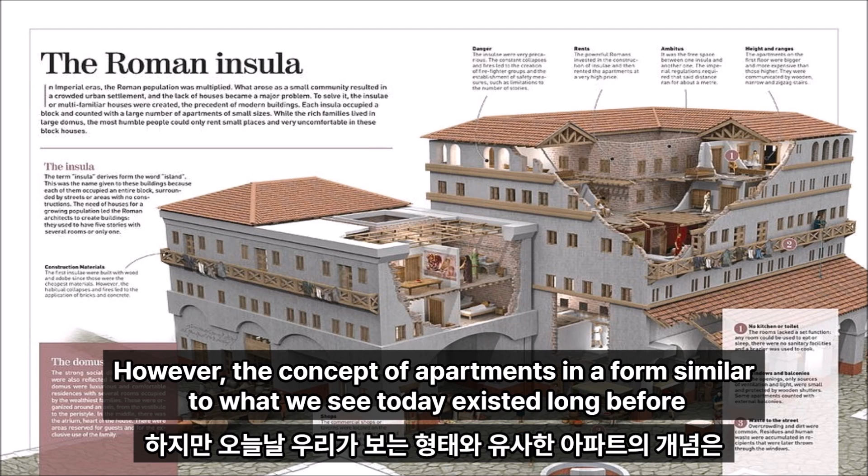When we hear the word apartment, many people naturally think of apartment buildings imported from the West after the Industrial Revolution in the 19th century. However, the concept of apartments in a form similar to what we see today existed long before, dating back to the ancient Roman Empire.

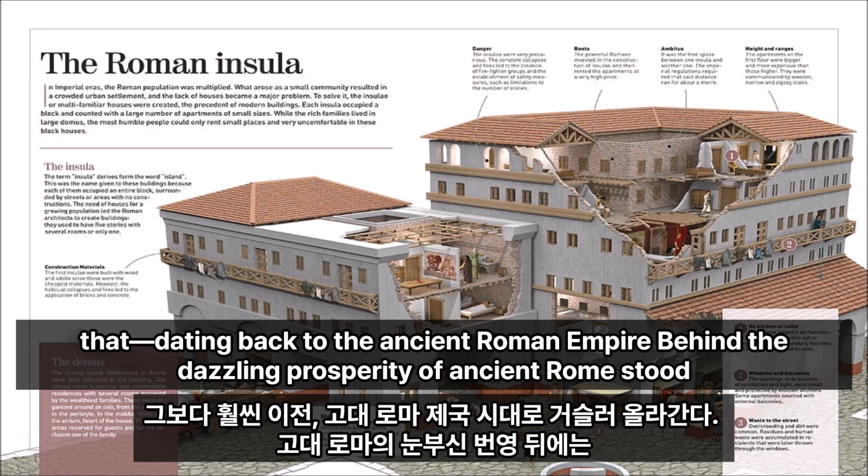Behind the dazzling prosperity of ancient Rome stood a unique architectural structure called insulae, which housed a significant portion of the urban population. Derived from the Latin word for island or building, insulae were more than just residential spaces. They were time capsules vividly capturing daily Roman life, social challenges, and a strong sense of community.

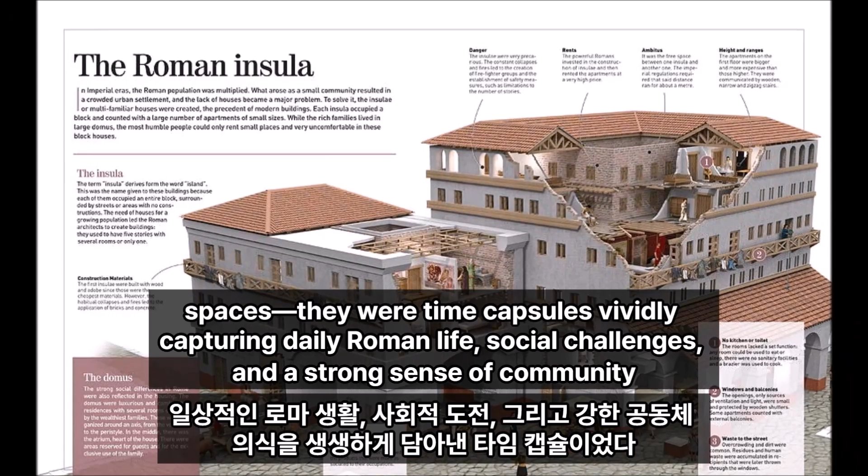Some insulae were over 10 stories high, and since there were no electric elevators at the time, higher floors were cheaper. These apartment-like buildings, constructed with wood, brick, mud, and a natural cement used by the Romans, spread not only throughout Rome, but across the empire's major cities.

After Rome dominated the Mediterranean in the mid-2nd century BCE, the population soared, reaching between 80 and 100 million by the 2nd century CE. Rome itself exceeded 1 million residents, and as housing shortages worsened, insulae construction rapidly increased.

Insulae were essential elements of the ancient Roman cityscape, serving both residential and commercial purposes. They were built vertically to maximize efficiency in limited urban spaces.

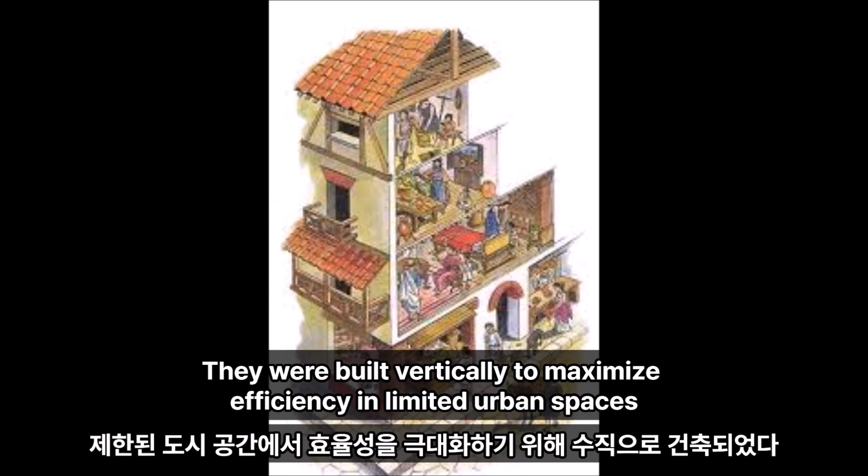Initially, wood and mud bricks were the primary construction materials. Over time, to reduce fire risks and improve structural stability, fired bricks became common, and the ground floors were typically made of stone for a solid foundation and protection from floods or street disturbances.

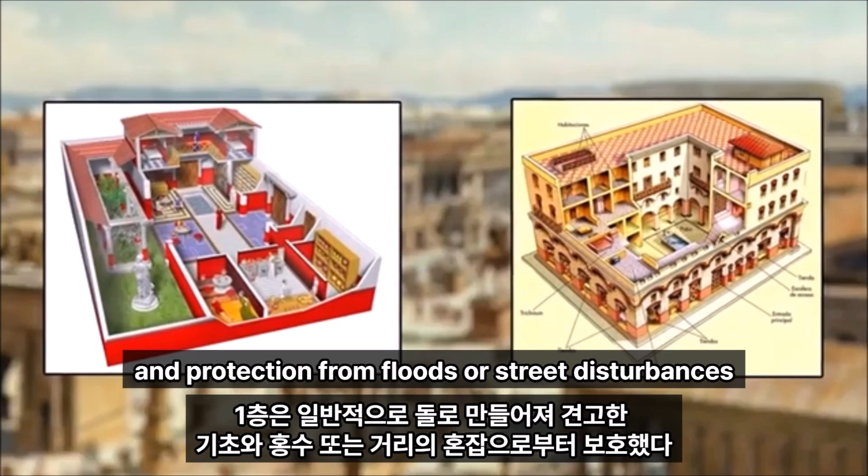Most insulae had up to 6 floors. The ground floor was used for commercial purposes such as shops or taverns, providing income for building owners and convenience for residents. Upper floors served as living spaces, with basic rooms arranged along a central corridor.

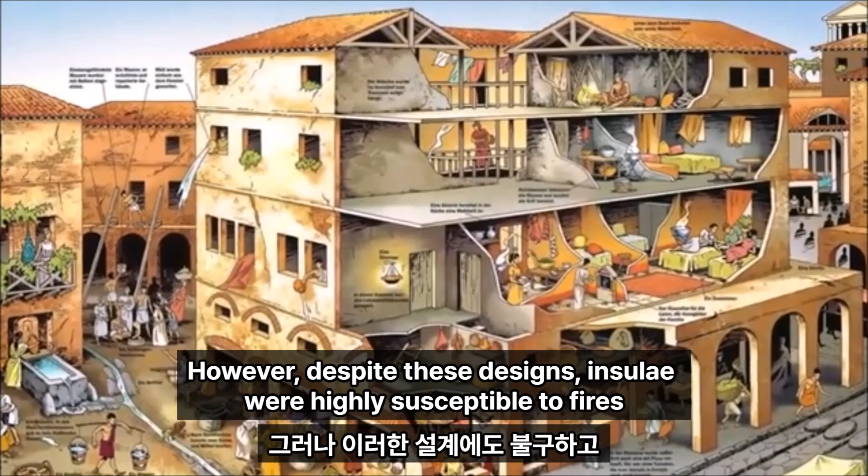However, despite these designs, insulae were highly susceptible to fires. The use of flammable materials in upper floors and the close proximity of buildings posed serious hazards.

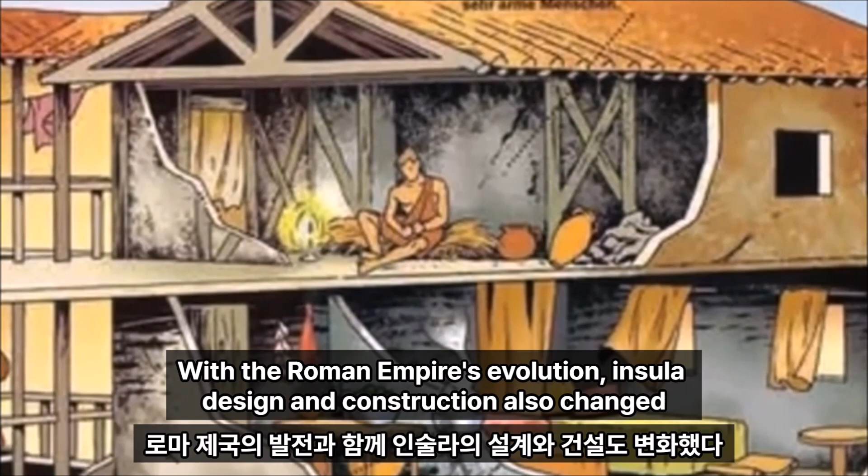With the Roman Empire's evolution, insula design and construction also changed. Advances in building technology, shifting societal needs, and government regulations led to improved versions with fire-resistant material and structural reinforcements. These developments reflected Rome's architectural adaptability and its responsiveness to citizens' practical needs.

Though insulae were vital housing for lower and middle-class Romans, they came with numerous challenges. Overcrowding in small spaces led to persistent problems like fire, noise, congestion, and structural instability. Some insulae were illegally extended up to 10 or 20 stories.

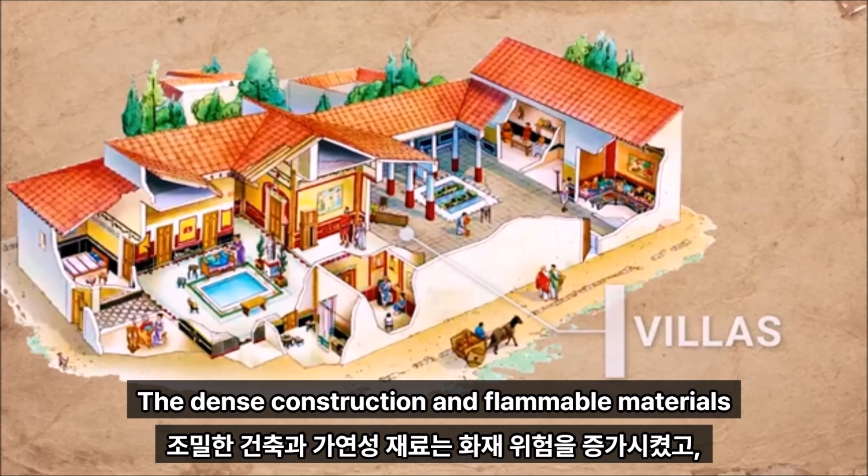Noise was another chronic issue. Constant sounds from ground floor businesses and the bustling streets disrupted the residents' peace. Thin walls and a lack of soundproofing only amplified the problem.

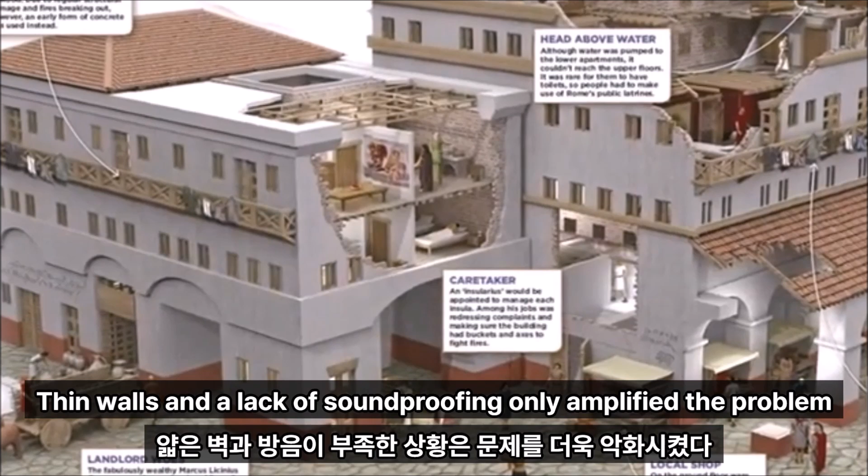Insulae were also plagued by overcrowding and instability. Some buildings were built quickly and cheaply, risking collapse. As population density rose, more people crammed into small spaces, often resulting in unsanitary conditions, with multiple families sharing a single room.

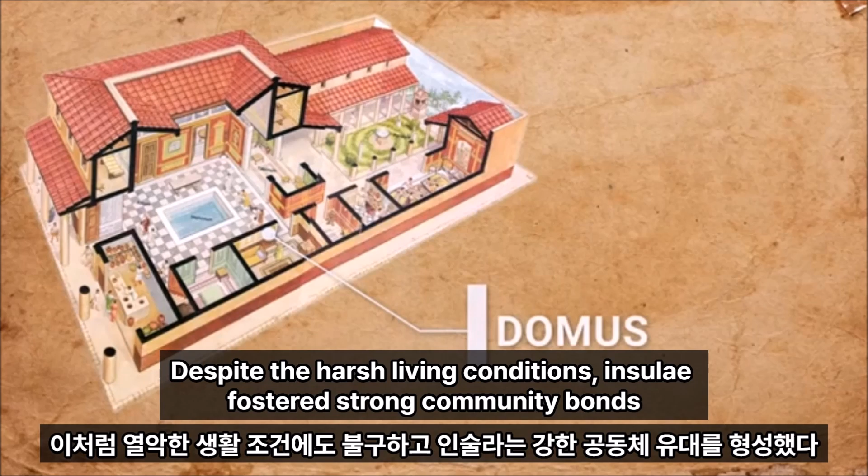Despite the harsh living conditions, insulae fostered strong community bonds. Neighbors who frequently interacted in tight quarters came to rely on one another. Daily exchanges, borrowing items, or sharing news helped forge close relationships. Though thin walls sometimes compromised privacy, they also encouraged mutual understanding and empathy.

The streets around insulae were centers of lively community life. Merchant calls, artisan hammering, and the aroma of food made the streets more than just thoroughfares. They were spaces full of vitality. Children played in courtyards and alleys, developing social skills, while adults built connections through shared meals and religious ceremonies.

The socioeconomic diversity within insulae also contributed to a unique community culture. Wealthy merchants and poor laborers coexisted in the same buildings, forming cooperative relationships not often seen in modern urban settings.

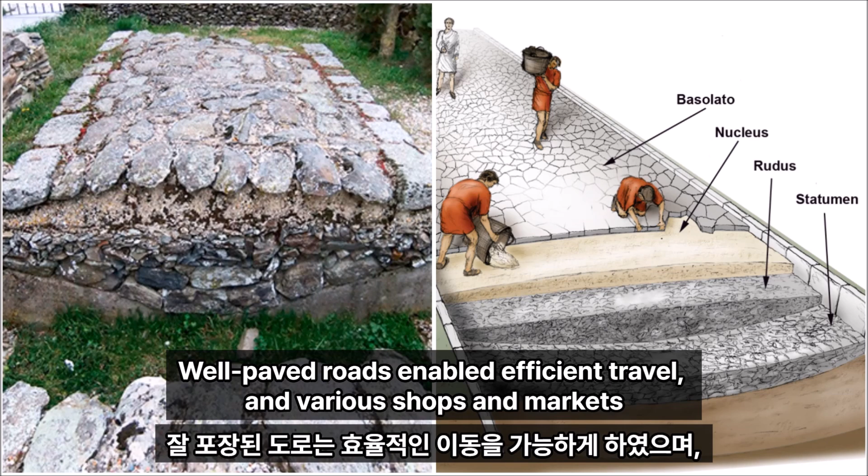Rome's excellent urban planning and engineering provided essential services to Insula residents. Its famed aqueducts delivered clean water across the city, and people fetched water from public fountains. Well-paved roads enabled efficient travel, and various shops and markets offered goods and services nearby.

Though different from modern hospitals, temples and visiting physicians provided healthcare, while public baths offered hygiene, social interaction, and relaxation. The Cloaca Maxima sewer system played a vital role in maintaining sanitation, and thermopolia, hot food stalls, supported busy urban lives with ready meals.

Insulae frequently appeared in Roman literature, drama, and poetry. In the comedies of playwright Plautus, the cramped, chaotic settings of Insulae often served as humorous backdrops. Poets used them to depict the struggles and hustle of urban life. Legal documents also reference Insulae in property and inheritance disputes.

Meanwhile, in the Middle East, apartment buildings began proliferating during the Middle Ages. Though they were rare in sparsely populated desert regions, major trading cities like Cairo, Baghdad, and Yemen saw a rise in apartments due to population growth. Yemen's Shibam, with over 1,000 years of history, is a surviving example and a registered UNESCO World Heritage Site.

While the exteriors of apartments originated mainly from Western and Middle Eastern styles, the interiors, with wallpapered walls and room division, trace back to East Asia.

Modern interior design began in 17th century Japan. After the Imjin War, the peaceful Edo period allowed commerce to flourish and cities to expand rapidly. Edo, the shogunate capital, once exceeded 500,000 residents. This led to the rise of communal housing around Joka-machi castle towns, which became the commercial hubs of each region.